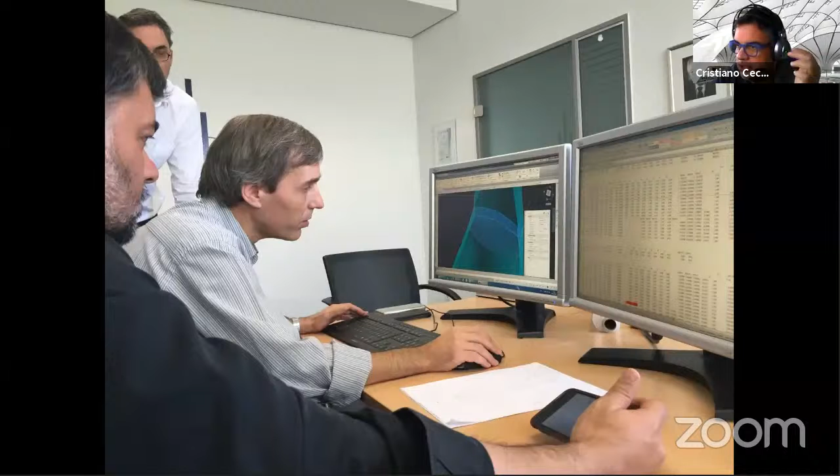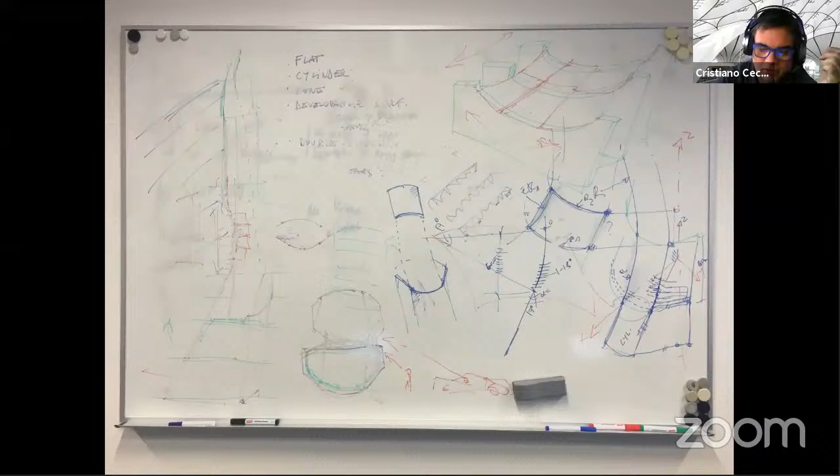This went downstream on the engineering side, which has to do with when you're looking at complex forms, you have to think about a real collaboration between the engineer and architect. You're working closely in terms of translating ideas from three-dimensional design into constructible form, looking at how you're going to build a particular shape sculpted out of concrete, with different permutations, going from a concave to a convex shape as you rise up. How do you build that efficiently, at the same speed and with the same capability as if it were just a standard straight piece?

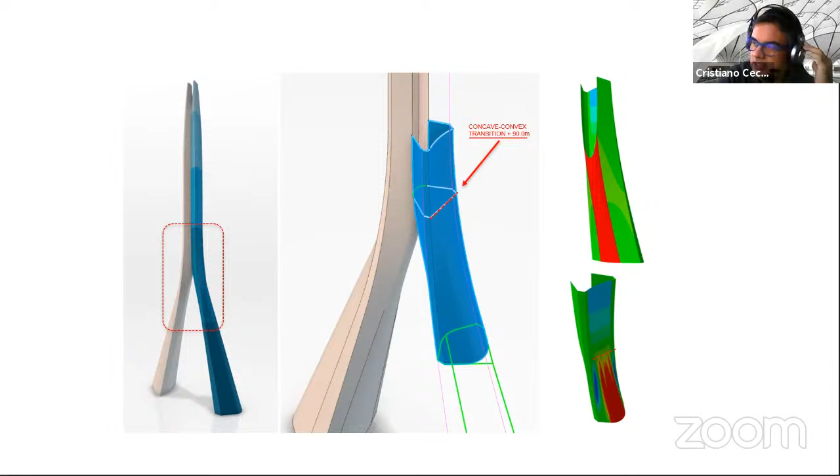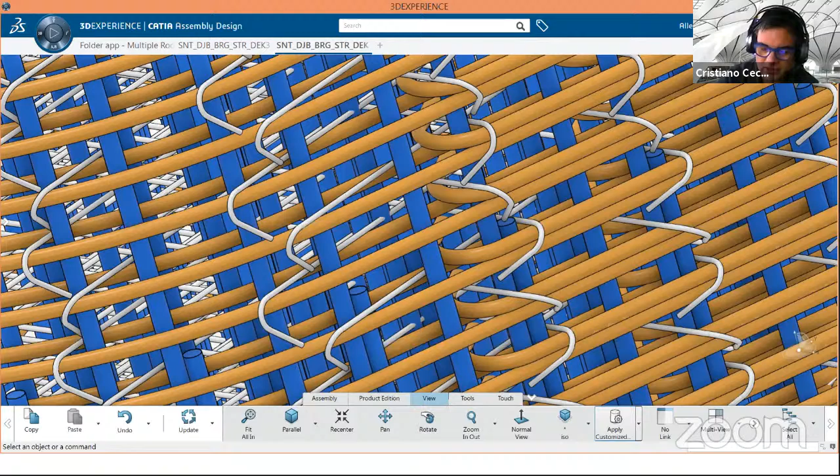To do that, because it was concrete, we worked with variable geometry formwork, which changes its shape as it goes up. It's something we can simulate in the computer, right down to the individual pieces of rebar, which is really required in order to provide the level of confidence to the authorities that what you're planning is something you can actually ultimately execute.

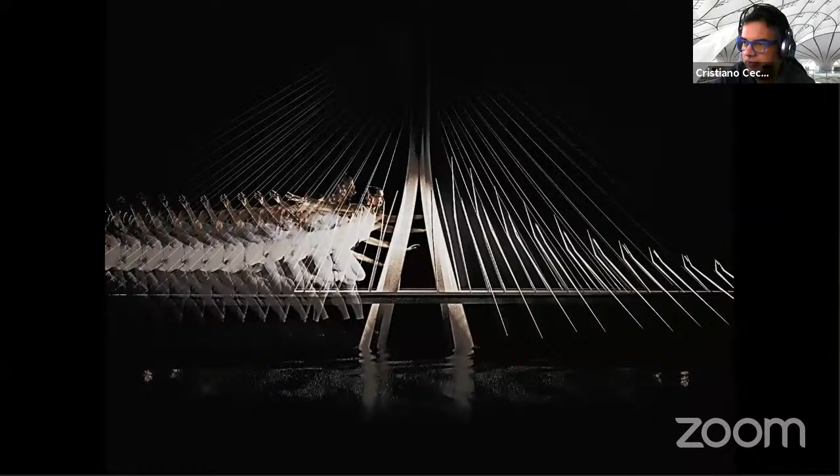Including then a bilateral symmetrical suspension system for the assembly. So what I'm trying to say here is that I'm a big fan of collaboration, because it gives you the possibility of confronting ideas that would otherwise remain sterile or misinformed, either on the engineering side or the architect side, and would just remain a kind of fantasy. If you bring those two things together, you can actually achieve a kind of poetic effect of movement, of dynamism, that maybe wouldn't be as possible for me as an architect without the input of an engineer, and for an engineer to think out of the box, unless they're working with architects. So this was a real engineering-architect collaboration.

They actually happened at the same time from day one. It was not really something that was a bolt-on or an afterthought, but really started from the very beginning.

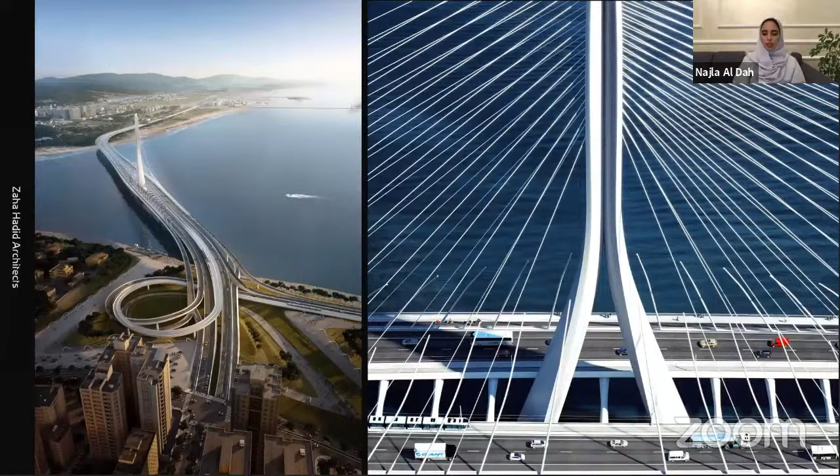Very beautiful. And just like Bart was saying, it used to be like a war between the architect and the engineer. Neither one would want to give the other a chance. It's beautiful to see what collaboration could do and the results of it. This is a really great project to showcase that.

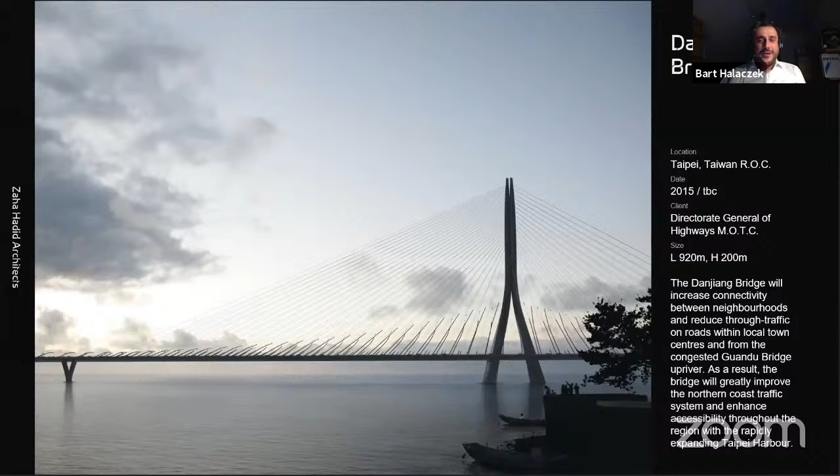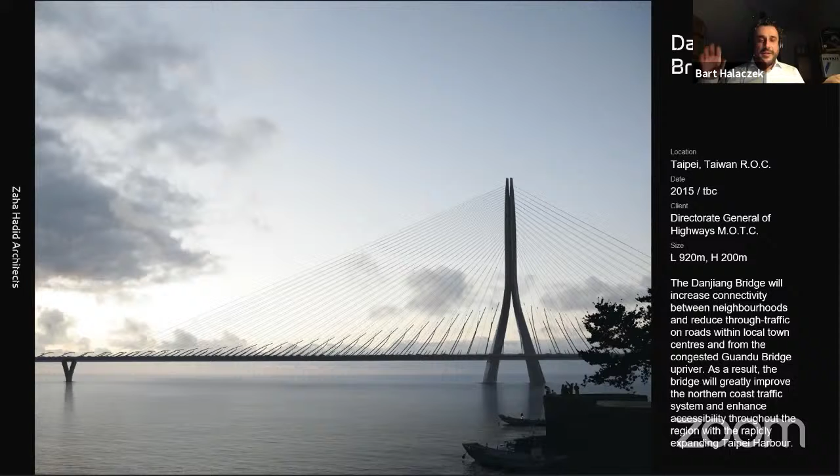To add to that, I personally have the feeling that calling it a war is a little bit of a harsh word. There was always very fruitful collaboration between engineers and architects, and probably the most beautiful structures in the world came out of these collaborations. I think only right now, with increasing complexity in technology, we are all forced to work back together, because each discipline on its own cannot survive. War might be a harsh word, but there was definitely a frustration.

So Marijn, looking at several bridge projects that Next Architects have designed, you can sense a deliberate approach to creating a more intimate relationship between the bridge and the user. So in the case of, I'm not sure if I'll pronounce it right, Zalige Bridge?

You maintain the notion of a flood by creating the bridge, which is only accessible at certain times of the year. So what's the main idea behind it, and does that result in a challenge due to limited accessibility?

Well, the Zalige actually means blessed. It's the blessed bridge, not because the bridge is blessed, but because of the road which is the connection the bridge makes, which was called the blessed road. Let me share also some pictures.

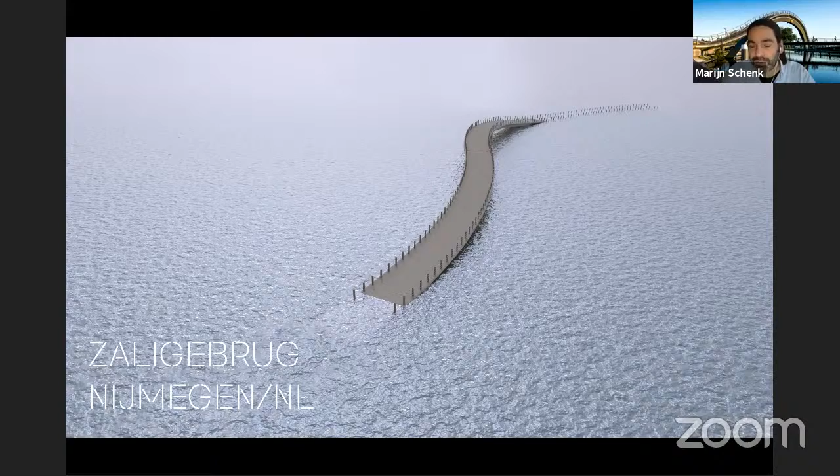This is actually a rendering we made for the bridge in very high water. You have to know that the Netherlands is actually the drainage point of Europe. We are under sea level, so all the rivers of Europe come to the sea in the Netherlands, and so we have these situations where large parts of the area are being flooded.

It's not an incident, it's on purpose. They designated several areas to be flooded areas, but the condition is also that these areas can be very dry. So there's an enormous level of up and down going water, and since the water is continuing rising, they mark certain areas in the Netherlands to give the water more room.

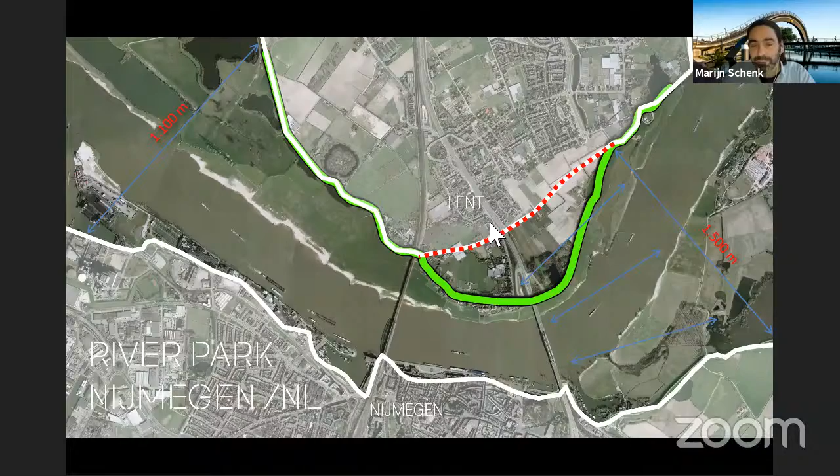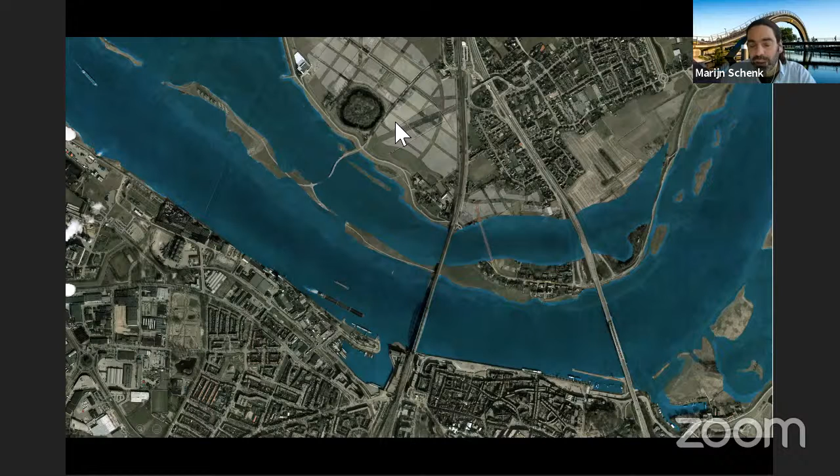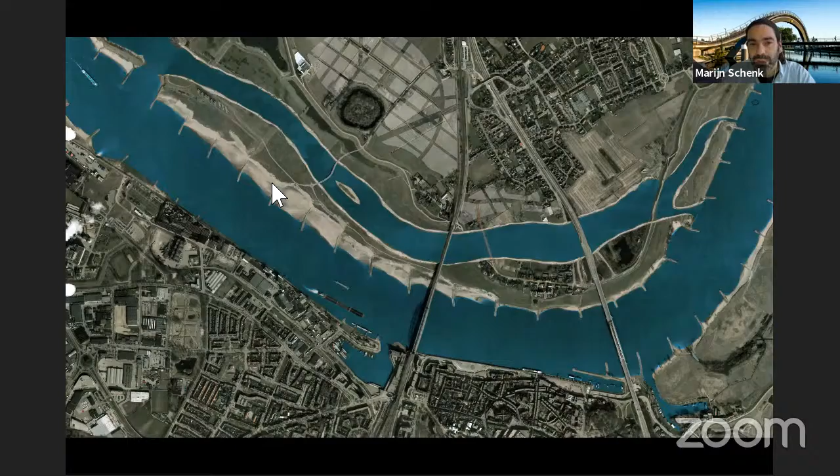At this point, they moved the dike from the green line to the red line, creating a bypass, and the bypass can accommodate a large amount of water, can become very dry, almost without water, and it can be completely flooded. This is actually the bridge we made, and the condition was that at the moment the water is that high, you cannot cross anymore, and when the water is very low, the bridge is partly crossing the land.

So we thought it would be very nice—this is not a bridge, but there was a reference image—to make a bridge where you really make use of the presence of the water. We wanted to make that idea very strong, to show with this bridge the conditions. So this is the area under construction, and this is the area at the first moment of rising water. Here you see it at a low tide moment, where people are jumping from it, biking on it—it becomes a sort of recreation landscape in itself.

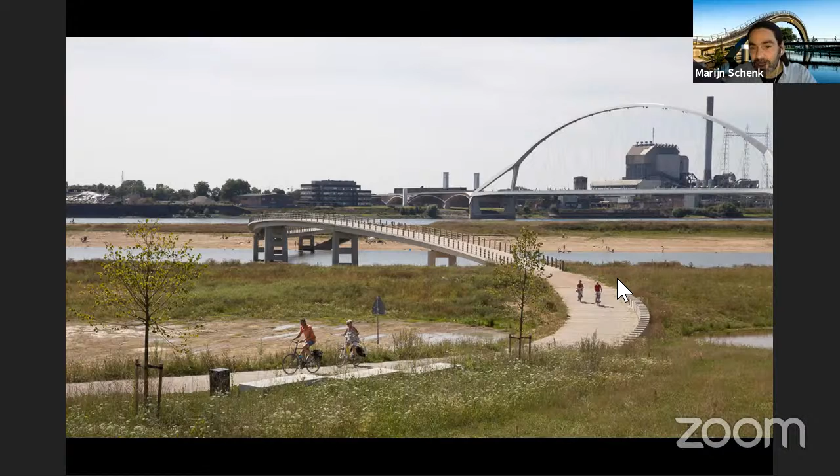Here you see the bridge continuing over the land, and here you see the stepping stones. We thought it would be great that when the water is rising, with these elements like the stepping stones, still some parts of the bridge can be used. Like in this image, the bridge is for a great part already under the water, but through the stepping stones, people can still make use of the connection.

By introducing these kinds of elements, we sort of demonstrated the impact of the rising water in the Netherlands. So this image actually became quite an iconic image to talk about how in the Netherlands we have to deal with the water coming once in a while in our country.

Looking at these photos, I'm now thinking, did you consider water level rise? As in, due to the environmental issues that we're going through, the fact that water levels could keep on rising in the future—does that mean this bridge could not be seen one day?

Well, actually, that could happen—that at a certain moment the bridge is completely covered by the water. Actually, what we wanted to do with this bridge is to show that we're no longer at the moment where we have to prevent water and block the water, but we actually have to embrace it, because blocking water doesn't work anymore. Then we should make dikes everywhere. So we should embrace the water and see the qualities.

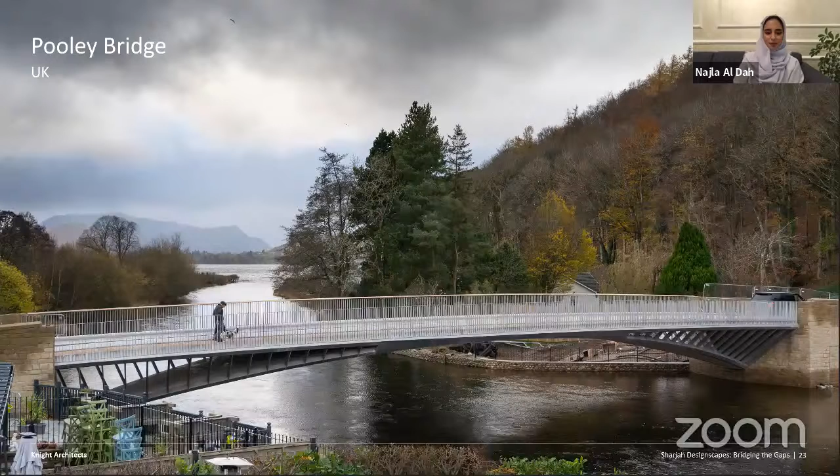Right, this is the new Pooley Bridge in Cumbria. It's a replacement bridge for a beautiful little stone bridge that comprised three arches, which was sadly washed away in one of the increasing floods in 2015. So not only in the Netherlands, but also the UK faces an increasing threat of floods, less coming from the sea, but coming from severe weather conditions which increase river levels very, very quickly.

This was a major drama in the community of Pooley, because it was the only link within the town connecting the two shores without taking an hour and a half route around. Also, the bridge was a representative element, so many people's hearts started to bleed once the bridge was destroyed.

When it came to reintroducing and building a new bridge, there were, from the side of the public, a lot of very strong opinions on what they wanted to have. One side wanted a bridge that resembles exactly the original, whereas other people wanted something modern. So our task was to design something that resembles the original bridge in a particular way, but also appears modern, which is a very, very difficult balance act to do.

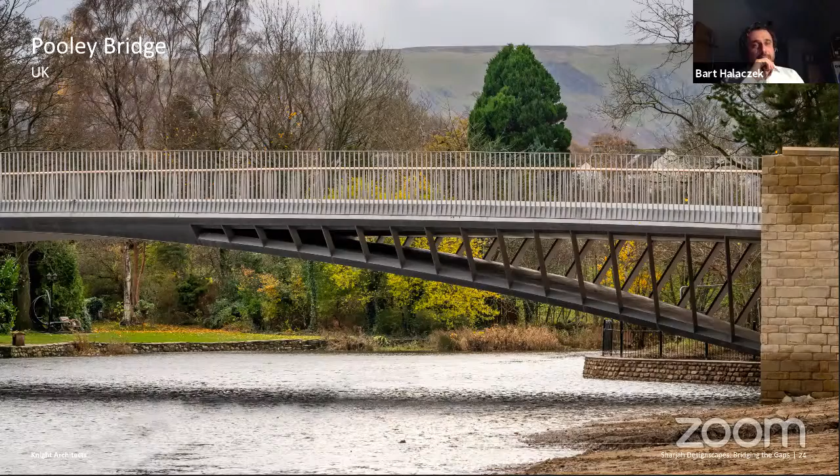The specialties of it are, first of all, we don't have the two piers in the water, so the floodplain is completely open. The bridge is made of stainless steel, so it can be flooded, it can get underwater without facing the issue of corrosion. But also the open spandrels make a reference to old Victorian bridges.

Most importantly, everything was designed by constant public scrutiny. We had a number of public presentations and discussions with the public on how the bridge should look like, and it ended up with this beautiful structure.

And I don't have the picture right now here, but people leaving engraving their names. People who donate to the bridge engrave their names in the footplates on the pedestrian deck. So that's one way of approaching these questions.

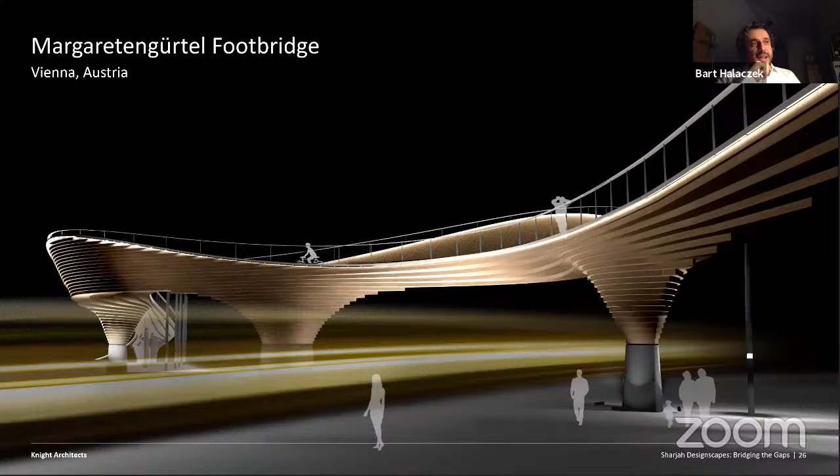The other way is talking about sustainability, and that's a topic that is becoming very urgent at the moment. We talk about global change, so not only flooding will be a problem, global heating will be a problem, and the question of having a carbon sink is essential.

In Germany, there is currently a renaissance of timber bridges, and this is a design that we won a competition in Vienna 10 years ago, which sadly has not yet come into construction. However, many similar types of structures use timber as a natural carbon sink for footbridges, but also for bigger bridges, in order to massively reduce the carbon footprint of bridges, which the building industry is a major contributor to.

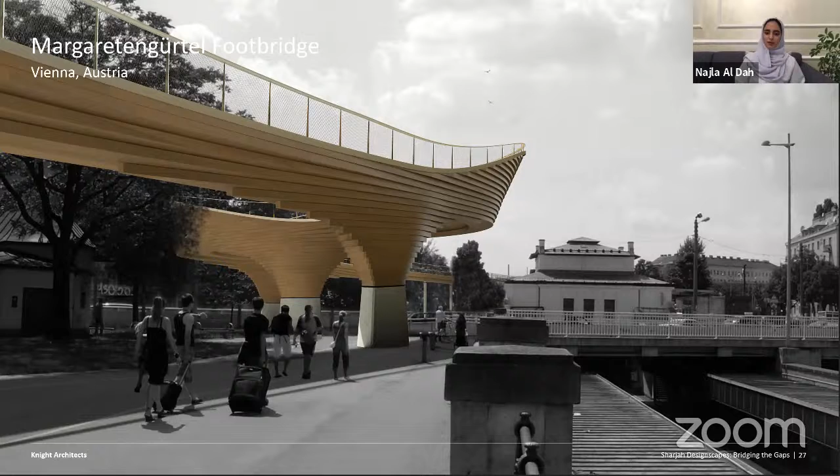And that's really beautiful. I absolutely loved in the Pooley Bridge that you've shared how you managed to save part of the existing original bridge and then connected it with a new modern bridge. You're respecting what was and then adding to it. So that's a really beautiful element.

Well, that comes back to the question of why is it needed and who is it for, which are, I think, the two most important questions for every architect before they start designing, but also especially in collaboration with engineers, where the focus way too quickly goes towards what is the problem and how can we solve it. So we could have delivered a much simpler solution, which would not be pretty, and then face the anger of the local public, who will then have to live with that bridge for the next 100, 120 or even longer years.

It's great that you're considering the community. Cristiano, I wanted to know, we've discussed the collaboration between the architect and the structural engineer, but how does the process of designing a bridge differ from a building for the architect? Maybe we can discuss the Sheikh Zayed Bridge in Abu Dhabi that Zaha has worked on. Does the shape, or the vision for how it's going to look like, begin with the architect, similar to when designing buildings, and then looking at structure, or is it coming together at the same time? How is it exactly?

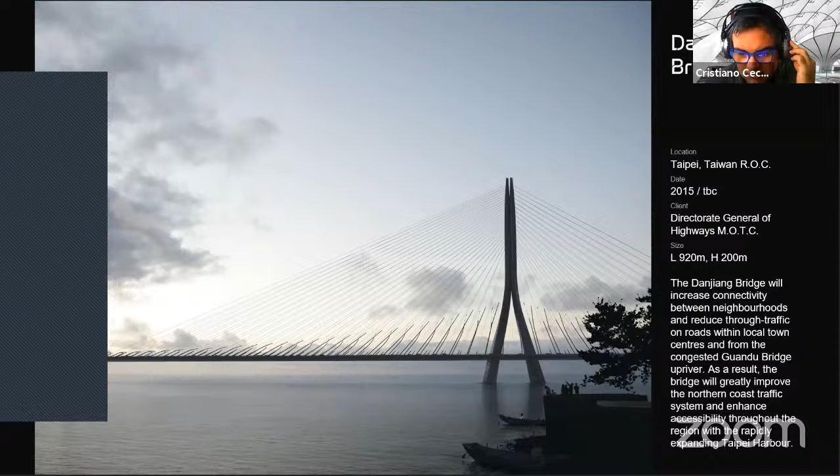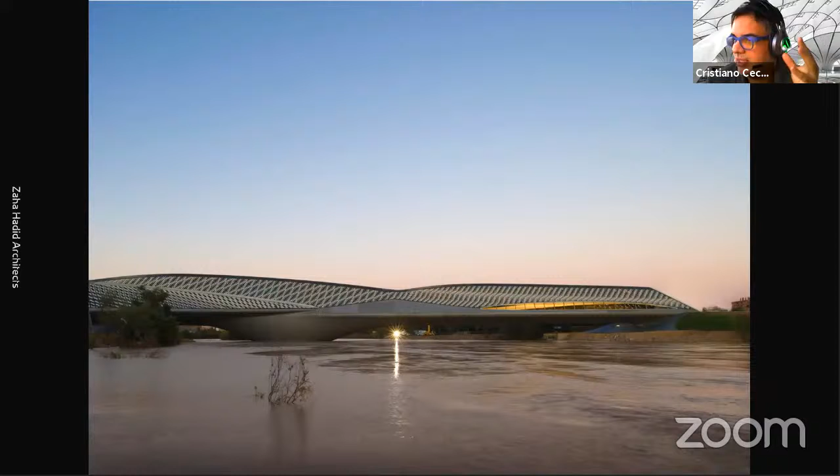Let me give you a couple of examples. This one we did in Spain is a very different kind of bridge because it's an inhabited bridge in Zaragoza, part of a pavilion for the Expo in Zaragoza in 2008. It spans the river Ebro, but it's not primarily driven by issues of long span design. It's actually closer to what the Ponte Vecchio in Florence was, or what London Bridge used to be hundreds of years ago, an inhabited bridge. It's closer to that in terms of its function, so there's an architectural program overlaid on this.

Same thing for Sheikh Zayed. It's not a bridge driven primarily by its span conditions, because the span here is relatively mild. It's driven more by its architectural expression. In the daytime you see this very sleek horizontal plane interwoven by these large wave-like structures, and then the appearance it has at night is completely different.

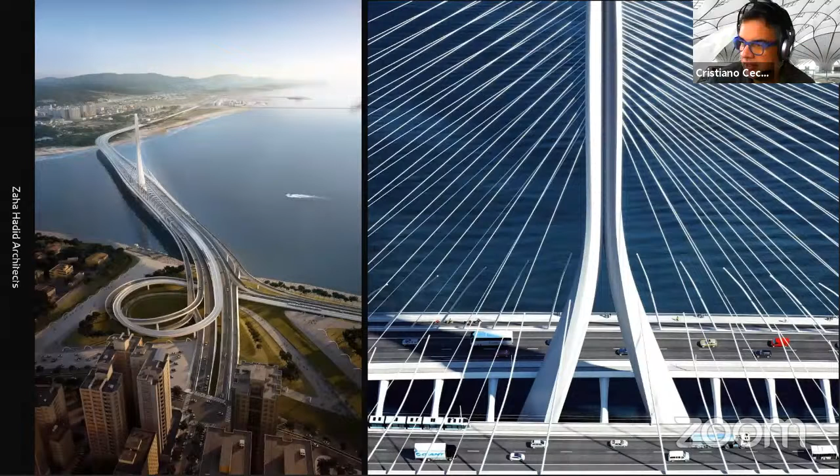Something to bear in mind, which we also did on the project in Taiwan I showed before, is that each of these structures expresses itself very differently at different times of day, and you have different kinds of people moving through it. People in Abu Dhabi probably spend more time driving across it than walking, because of the environment and temperatures and where it's located. The exact opposite is true for Zaragoza, where you can't drive across it, but people spend their time in it because of the galleries and exhibitions happening within the bridge. The one in Taiwan is sort of in between, because people cross it either with light rail or by car.

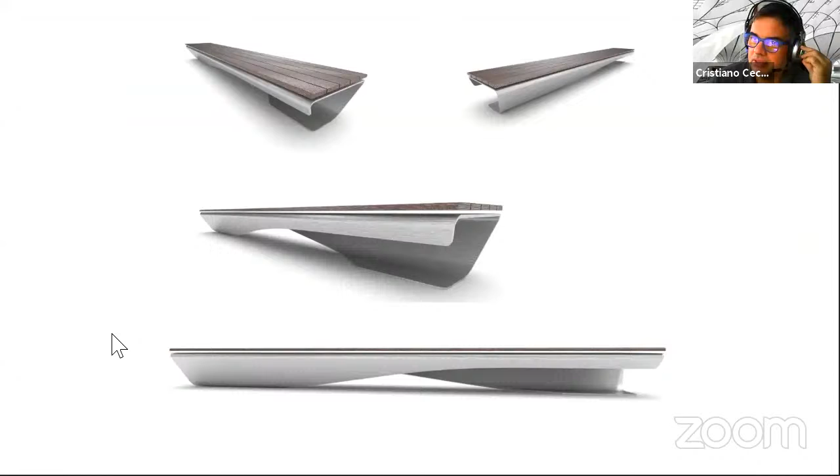What we also provided, just from some of the detailing, is a series of locations on either side of the bridge where people can stop, with street furniture, where people can enjoy that view I mentioned before, not just from the side of the river but from the bridge itself. You have to think about how the bridge will be used, and provide an opportunity for human beings to appropriate the building, to take it over by going there, by visiting it, by making it their own. If that happens, it really becomes part of the urban fabric that people know, because they get to know it, they get to love it, it gets to have a meaning for them. It's not just a new abstract object that parachuted in there, but somewhere I can actually go, and maybe have a nice memory there.

I may be biased, but the Sheikh Zayed Bridge is actually one of my favorites. Every time I drive through, since you don't walk it, it might not be a very long memorable moment, but it's definitely memorable. It's something I enjoy doing deliberately. If I'm going to Abu Dhabi, this is where I'm going to go through. So it's really nice to see such projects.

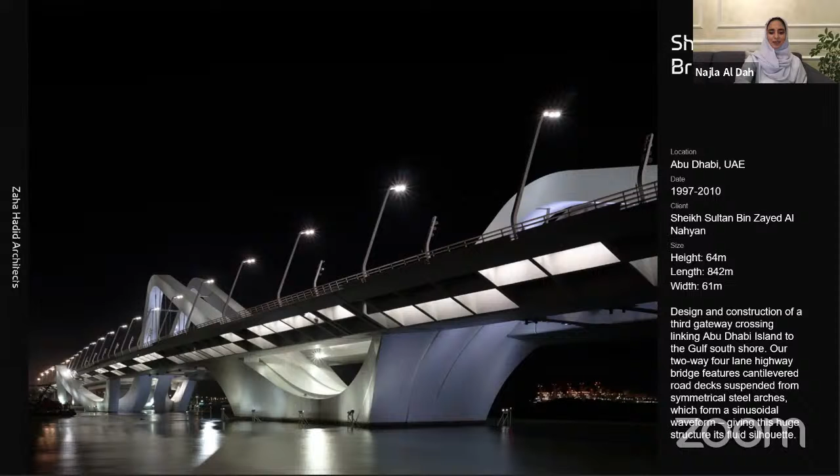So I wanted to talk a bit about how bridges in a lot of your projects don't just link communities and provide gateways to cities, but Next Architects also managed to turn one into a habitat for bats. Talk to us about this bat bridge, how did the idea come about, and what exactly did you have to consider during design and construction to make sure it lives up to its name?

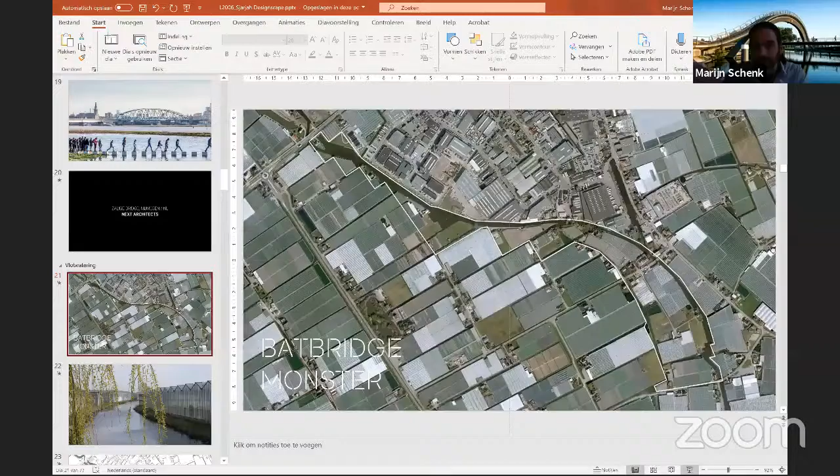Yes, I'd like to tell you about that. This is also a very typical image of the Netherlands. Once you've flown into Schiphol, the national airport, you might have seen all the glass houses everywhere, especially at night when they're all lit up. That's where all the tomatoes and flowers of Europe are grown. But you can imagine the impact of all these glass houses and all the light on nature is quite big, especially on all the ecosystems that used to be part of this area.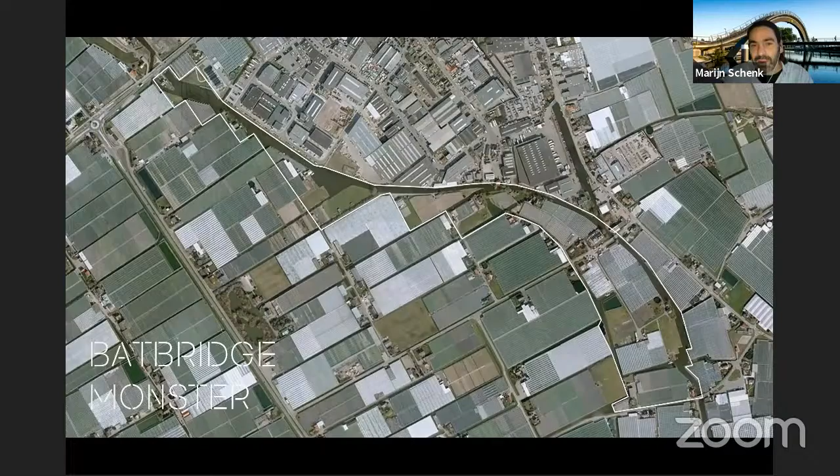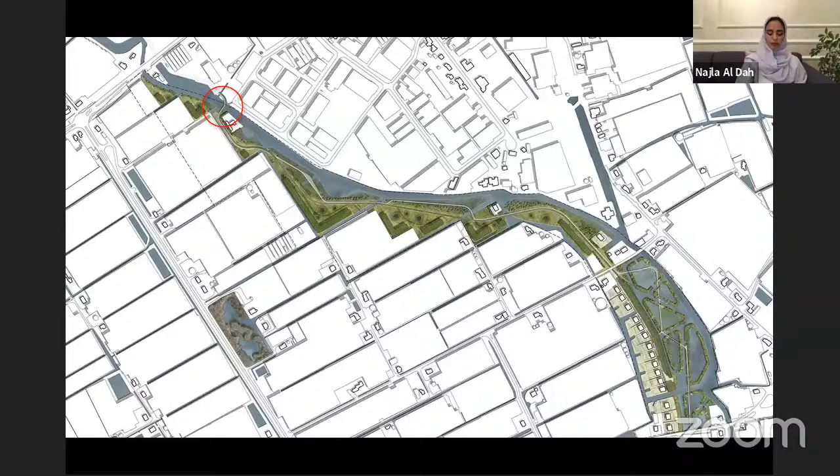So in order to compensate the impact on nature, the question was to develop a sort of landscape zone, a habitat for all different kinds of animals in this area. This was the original image where you see the glass houses almost on the edge of the water. So the main design, done by Lola Landscape, the Dutch landscape firm, was to create a natural zone within this landscape of glass houses.

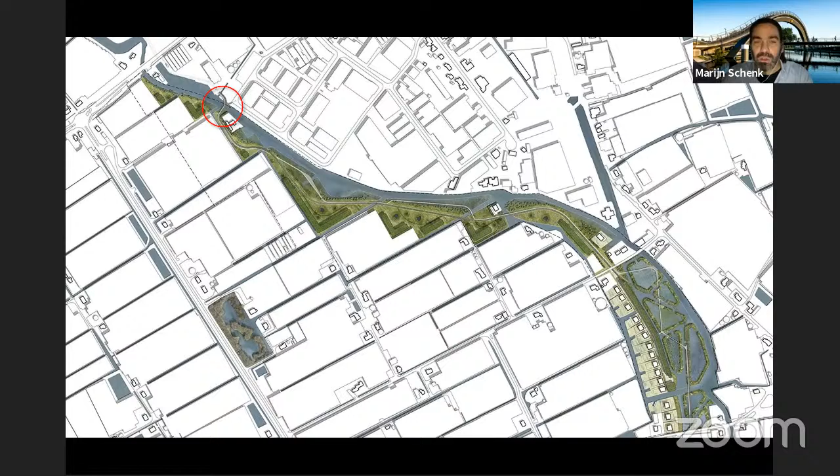Part of this natural zone is a route for bikes and pedestrians going through all these natural areas, and at the end, at the exit, there's a bridge. We were invited to develop a design for the bridge. So we thought, since the whole landscape is based on accommodating all different kinds of animals, maybe the bridge should add to that story. Can we make a bridge that's not only a connection for humans, who are already interfering in the area that much, but also introduces a beneficial quality for nature itself?

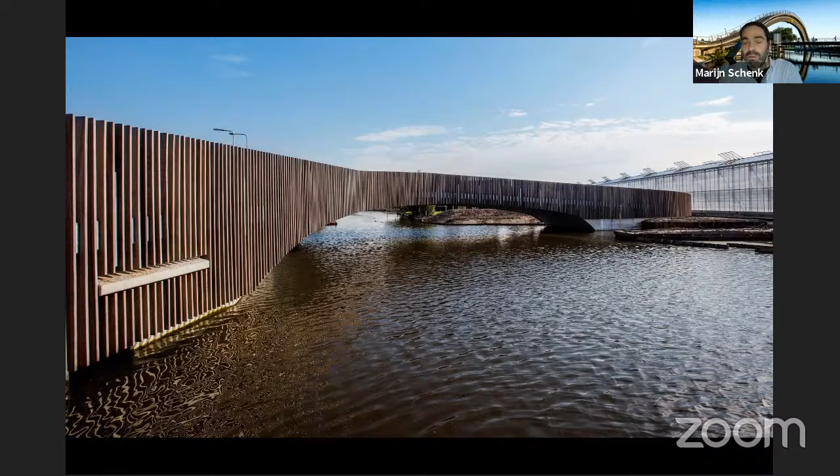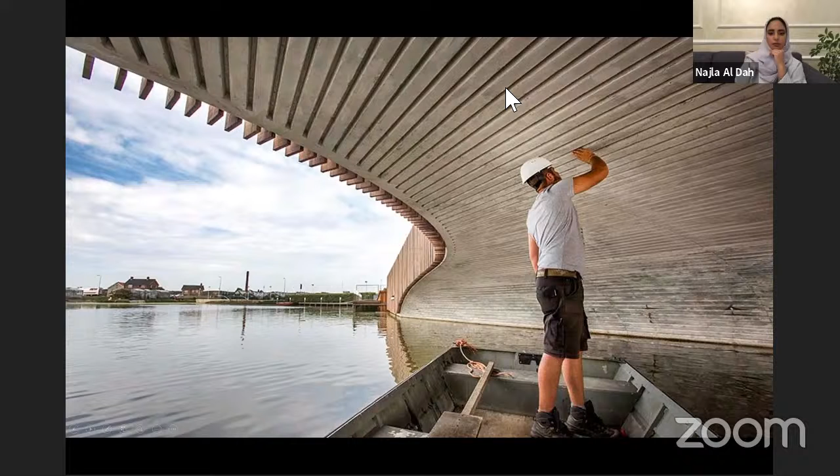So we made a winter house where you can enter. They're in the concrete base of the bridge where the temperature during winter is not that cold, so they can stay there over the winter. We used the whole bottom of the bridge to create this house for the bats in winter, and on the bottom we created a habitat for the summer. The whole concrete bottom of the bridge has these little incisions, and some of them are deeper, and they house the bats.

So actually it works - they did some tests. It took about 1.5 years for the first bats to move to the bridge, but now it's also known in the area as the bat bridge.

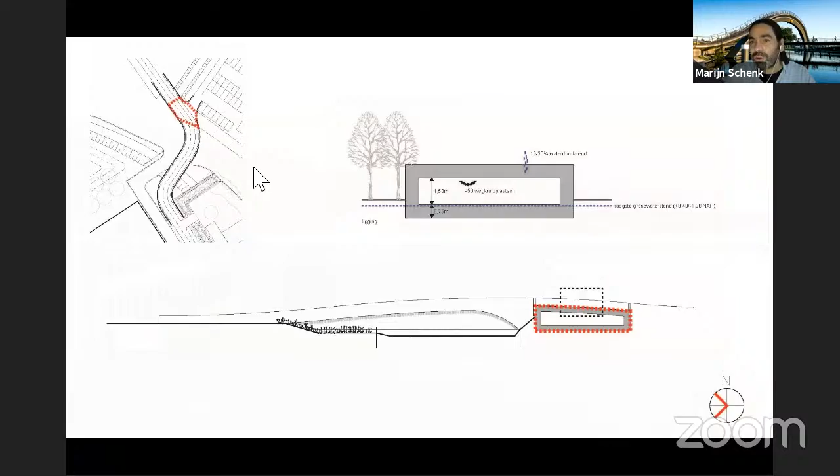Is there any maintenance that needs to be done? They don't want to do it, because when you have the winter house, which is over here, they have to create their own natural habitat, so it's not good for humans to interfere there - you actually cannot enter.

Super interesting. Yeah, I like the approach, honestly. The fact that you considered the living creatures other than humans is really interesting.

So I love it. Talking a bit more about the future, Bart, what's the future of bridges? Are there any big changes to be expected in the upcoming years with regards to materiality, maybe technology, even sustainability, social sustainability even?

Well, I think you've named it, social sustainability. We're just coming to the end of 2020, a year that has proven us a lot of things we couldn't predict and were quite wrong about in the past. One of these items is how quickly change in social mobility can occur. Let me just share my screen very quickly.

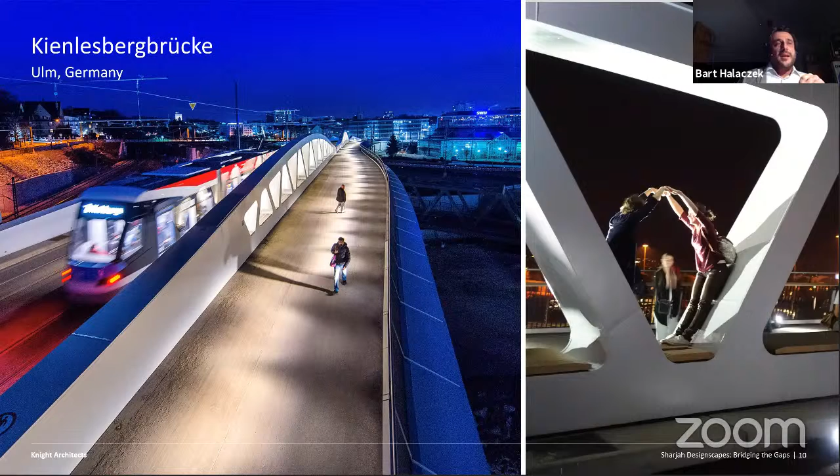This is a structure we've just opened, completed in 2018, a steel bridge crossing a railway line, mainly designed for a tram. But what you can see here are wide zones for pedestrians and cyclists, including benches for people to sit down and rest. So I agree with Cristiano here on the question of placemaking, making the bridge a destination.

But it reflects a more important trend - the switch of people from cars to public transport, or even to bicycles and walking on foot. So making these bridges more attractive for this kind of traffic is very important, and might be paramount in the years to come, where cities will start shrinking. More people will be working from home, and suddenly they will rely on a more enjoyable environment to walk along. Also, at the same time, we've got the question of self-driving cars, a reduction or maybe an increase of general traffic - we can't predict it very well. And this will all have an impact on bridge design codes.

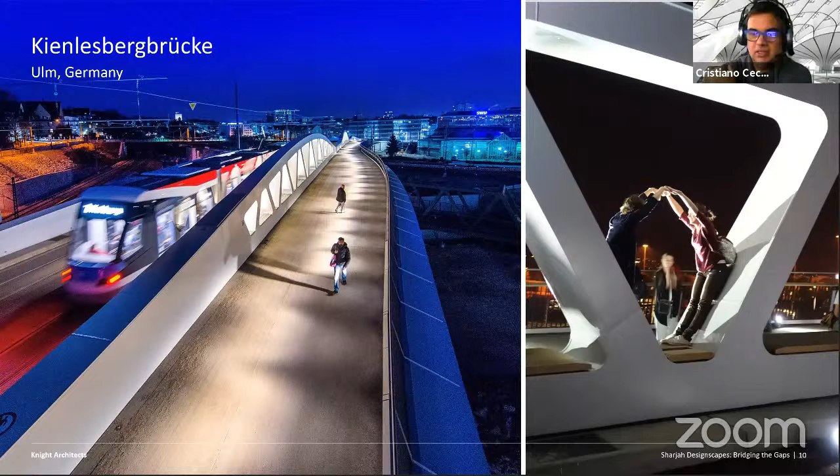There's a lot of very thin designs. If you look at the history of bridge making, you go back to Robert Maillart and thin, long span bridges. Actually, where I grew up, where I was in school, there was a very thin one in Switzerland - it happened to be by him. We take these things for granted now, but even back then, the way you worked in concrete, being able to increase this kind of span was something quite unique.

I just wanted to point out another point - you talked about social sustainability, which I think is really good, about the idea of connecting places that are otherwise disconnected. You have a lot of conditions in cities. For example, where I live in London, there's a big expressway that cuts two parts of the city in half, and there's only one place you can cross, even though these two parts of the city are so close together.

It really is like the Berlin Wall. It's like a river with no connection, but actually more brutal than that, because while a river is inclusive and you can go on it like a canal, this really is like the Berlin Wall, where the Westway is in London.

And the downside of that, of course, is the kind of reputation that certain bridges have developed. I don't know if you've seen a documentary that won at Sundance a few years ago called The Bridge, which was about the Golden Gate. It features the fact that that's actually the place where people in the States go to jump off when they decide they don't want to live anymore, which is very tragic - but it's almost guaranteed that it works, as it were. It's weird that something designed to connect people actually becomes a device for removing yourself from the world. Something to think about, along with the modifications they've had to make to that bridge to stop people from doing that.

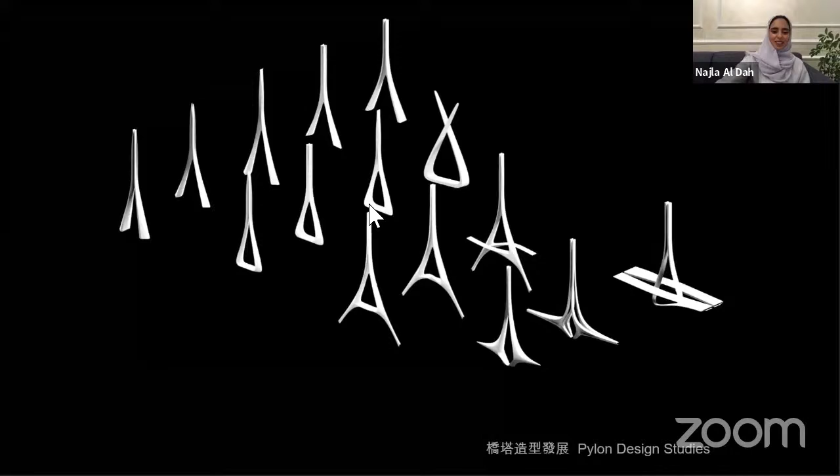And that becomes more challenging, especially when you're doing something that looks like what I'm putting on the screen here. I hope you can see that. I hope that's working—can you guys see like a bunch of little white things? Yep, okay good. No, because my Zoom crashed twice and it's not behaving very well today.

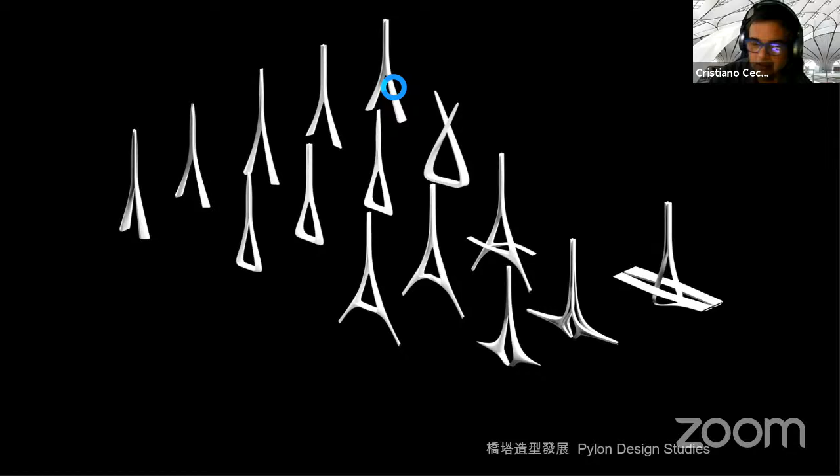So these are studies that we can do relatively quickly on the computer in a kind of cyclical, bidirectional exchange with our engineers, because we set up the infrastructure—in this case in the cloud—working with an engineering platform by Dassault, which is what people make aircraft out of, called CATIA. That means we can engineer every nut and bolt on this bridge in a single common platform.

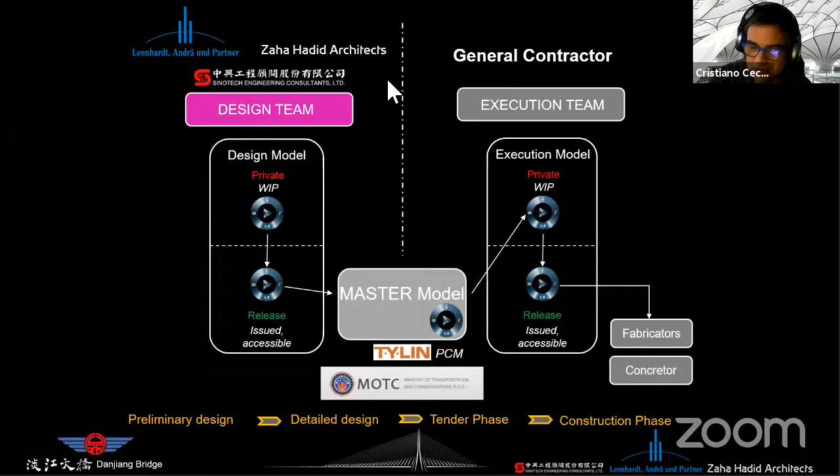That is the first step in trying to explain that what we're doing is not representational. It's actually an accurate three-dimensional, true virtual model of what we're going to build. When you have these complex models that include all the details, all the nuts and bolts, it's more than BIM—it's really a construction model, from which you can have all the simulations of rebars already integrated, right down to the individual details that allow us to directly fabricate each component.

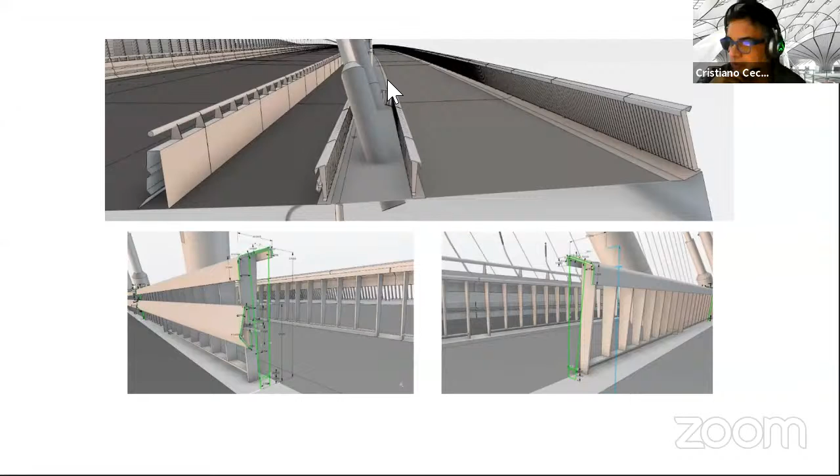On top left, you see, for example, the anti-crash railing that Bart was talking about.

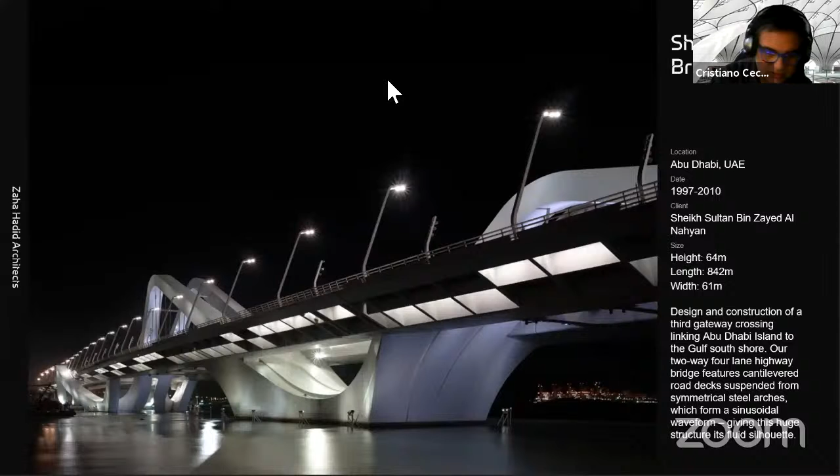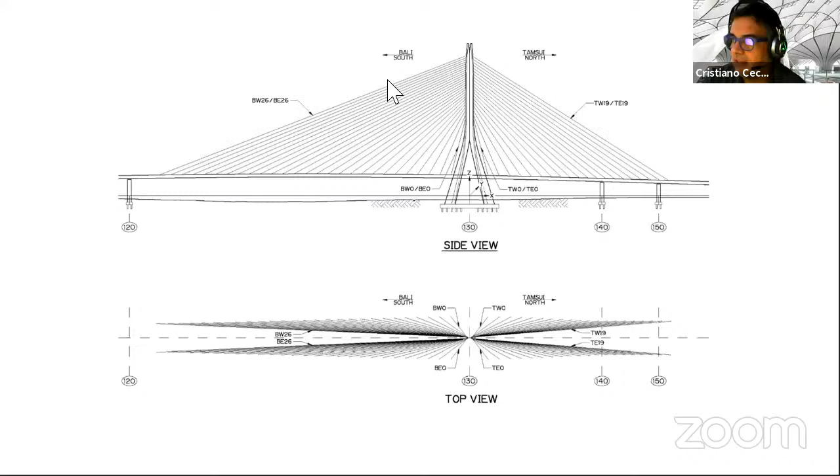What happens then is that normally we still have to execute a series of drawings like you see here. Drawings are required because we still have rules of construction and rules of tender procurement where everything is based on drawings that I sign and stamp. In fact, what you want is for people to work off a digital model, and that becomes difficult when you're working with a public client rather than a private client. Hence my point—the level of innovation you can achieve is much more difficult.

So if we're working in that green environment of shared 3D data within our design team, we're still required to produce over 1,000 to 1,500 drawings that are used to tender the bridge, because that's what's required by public procurement, where the government says the contractor has to build their own 3D model to build from. So the chance that my 3D model and the contractor's 3D model are going to be the same is pretty much zero.

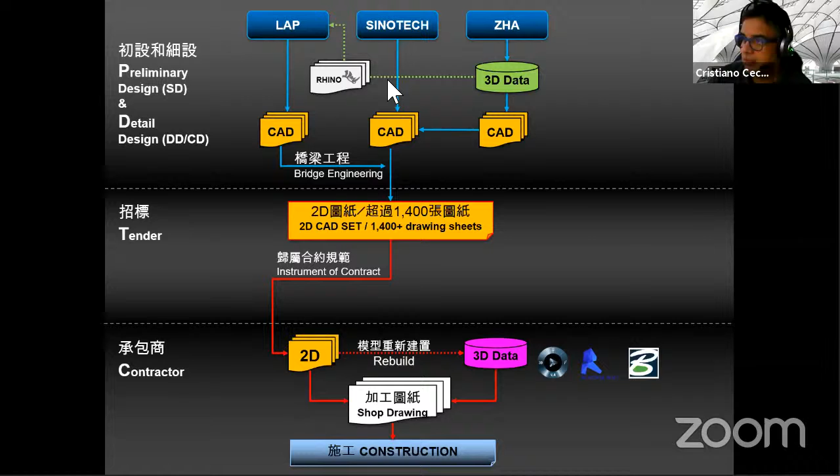So what we spend a lot of time doing is convincing the government that we could build a kind of legal wrapper around the model to allow them to elevate it to what, if you work with Boeing, they'd call authoritative data—meaning the data in the model is not just representational. It is actually the information, the instrument of contract, and that model can be handed off instead of or alongside the drawings to the contractor, which has advantages: it speeds up engineering time, reduces errors, and the contractor will probably give you a cheaper price because they don't have to spend two months rebuilding a model from scratch.

This kind of process is something we've been working with for a long time, something we had already developed back in Frank Gehry's office. It provides you the framework to take an idea that might seem challenging and have a mechanism to execute it in a way that you can control.

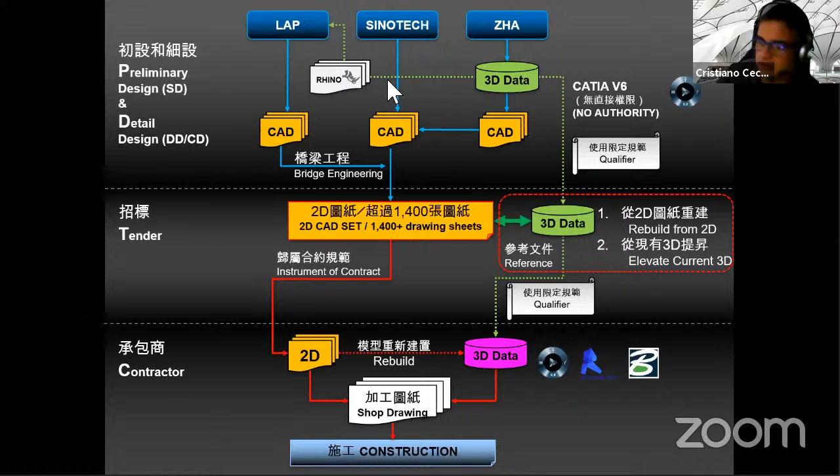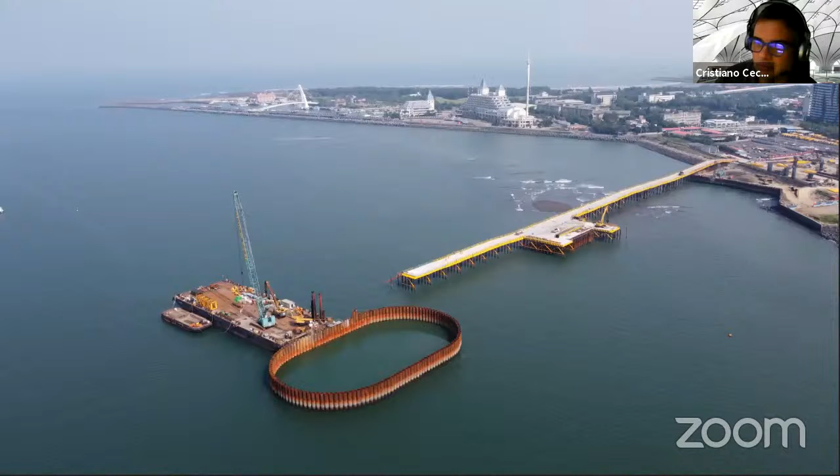So the important thing, I think, is that when you're working with particular kinds of clients, as the architect you also need to be informed about the pathways to getting your job built. In this case, it has to do with explaining to the Ministry of Transport of Taiwan how we want and need it to work, so they would have the confidence that the information encapsulated in the original 3D data can actually be taken, built, and executed in the model. The project is now in construction—we're building the caissons where the foundations are going in. If we don't have that in place, we're in a much more challenging situation to convincingly explain to the client that what we're proposing is actually achievable.

That's a very interesting approach and process. It really feels like this could be another webinar of itself.

Yeah, probably. Super cool. Marijn, with you, most of the bridge designs are, I would say, for pedestrians.

So do you find that clients intervene on a more personal level here? Yes, absolutely. I think the restraints with pedestrian and bicycle bridges are a little less complex than with car bridges. Also, the level at which you acquire the commission is different for most of our bridges. Usually the commissions are gained by competition, but the brief of the competition is usually a bit more free.

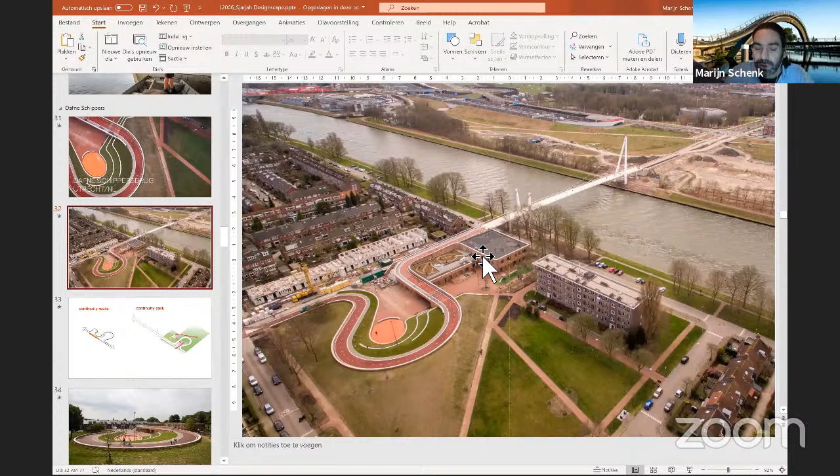One bridge I can show you is called the Daphne Schippersbrug in Utrecht. We won the competition by proposing to put a school underneath the bridge, which wasn't part of the brief. As you know, you need quite a long length to get to the height needed to cross the canal, which usually generates unpleasant spaces in public space underneath the bridge. We proposed to demolish the existing school and put it underneath the bridge, using the inclination we needed to create more interesting and defined public and safe areas for kids to play. We gained that freedom in the competition, which helped us win it and build it in the end.

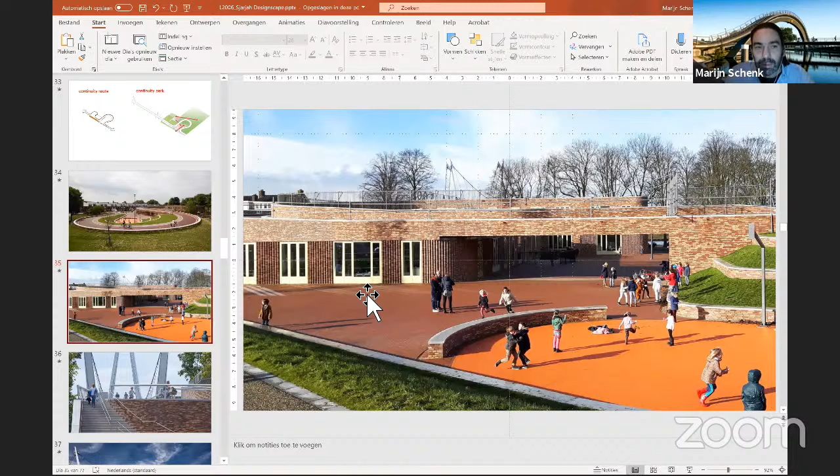Of course, with this bridge there are a lot of rules you have to apply to, like the inclination angle, the length you might need, the safety bar around it. But I think for bicycle and pedestrian bridges there's a bit more freedom. Of course it also depends on the place you're in, the municipality, and how the tender is organized.

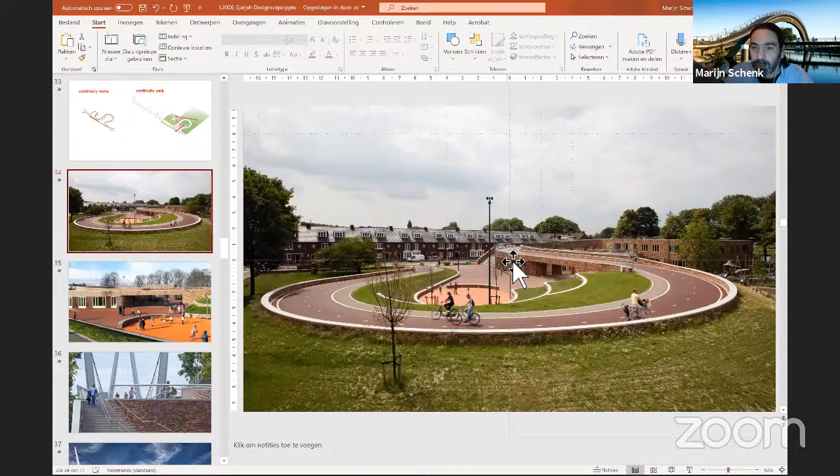I think the key in everything that you're showing, each and every different project, is basically opening the eyes of the client to issues they probably didn't think of. Like here, the safety, the school, the accessibility—in each one of them you're discussing something that probably wasn't in the brief. I believe that plays a role in convincing the client to go for that design.

Yes, absolutely. When we start our design process, it's always about trying to find in the commission something we could add to it, which isn't basically questioned, but which could generate quality and bring more to it than just this big infrastructure thing being put into a neighborhood. So how can you make it from something that's most of the time rejected by the people around it into something they start to love?